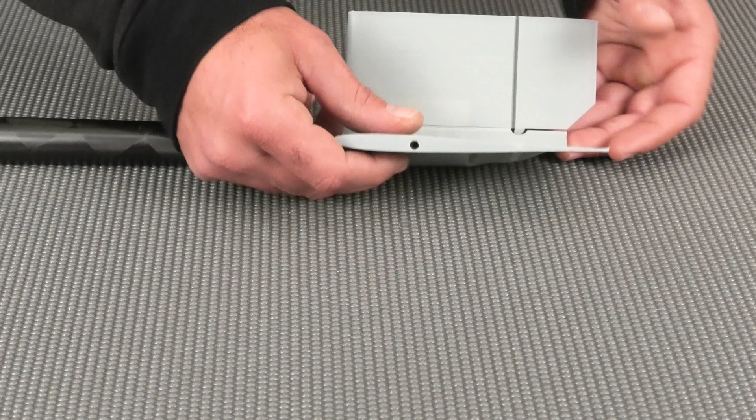In this video, we'll just show you how things come together in the 3D world, in SolidWorks, and how I went about designing all this stuff. So I'll give you a close-up of these 3D printed parts, and then we'll dive right into SolidWorks. So here we go. Here is the makings of a V-tail. I can actually remove these parts from the boom. This is a 60mm section of our V-tails. Obviously I didn't want to print the whole thing because that would just be ridiculous.

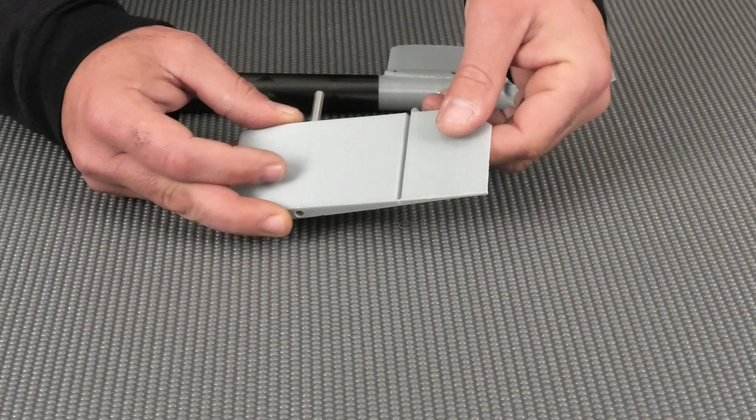I have some metal rods and a little carbon pin in here to simulate the carbon joiner and alignment pin, and we have a control horn here, and you can see the hinge line right here. So basically these parts are almost identical. We are going to use offset joiners, so these joiners aren't identical as far as their placement from the leading edge. So that's pretty straightforward here.

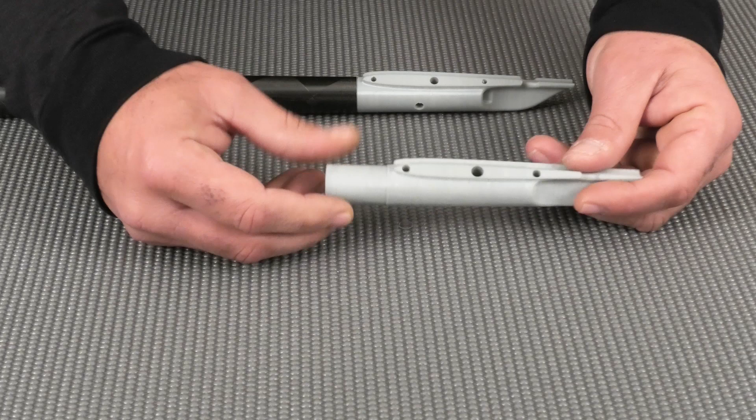And then we have what I call the V-tail mount. These parts are pretty much identical, except this is a final version, and I've increased the size of the carbon joiners to 6mm and the alignment pins to 4mm. On this guy, I had it at 5mm on the main joiner and 3mm on the alignment pins, and I was thinking that was too small. I also have some cutouts here for the push rod exits, but we'll cut those in the final carbon parts so they don't have to be in this 3D printed part.

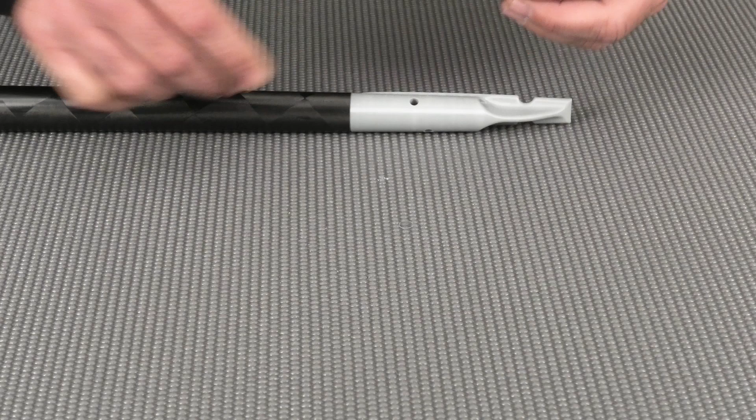The push rods are basically going to exit outside of the fuse and hook up to the tails with ball links. So there's not going to be a cover over this, like a cone. A lot of other models with V-tails have a cover that goes back here. I designed this to be as easy as possible to assemble at the field, basically just as easy as putting a T-tail together. So there you go.

And this guy here, I've already started sanding, and what I'm going to do is prime and polish it and take an epoxy mold off this part, just for prototyping purposes. I really want to lay up one or two carbon pieces and attach them to the booms and see how everything works with the push rods, the ball links, the control horns and all that before we go into aluminum molds.

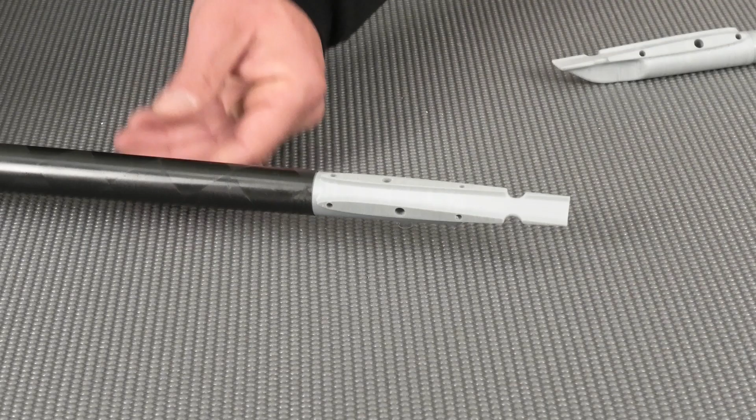The V-tails themselves will probably go straight into aluminum molds. We might mill plastic prototype molds first. I don't know, we're still debating that. So there's my 3D printed prototype parts, and now let's take a look at the computer work. Alright, so we're in SolidWorks.

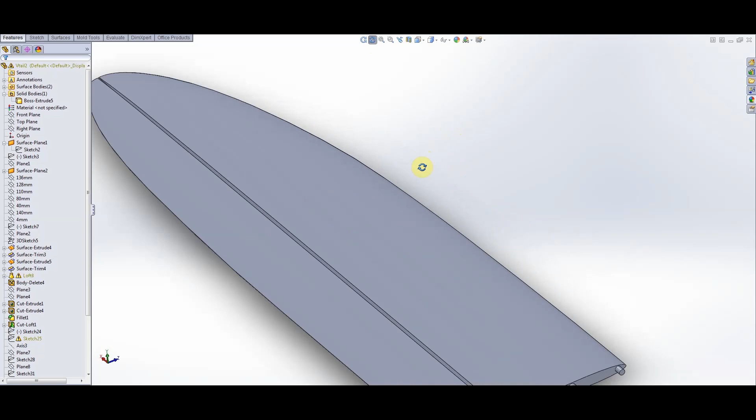Here is my V-tail. This is basically the finished product. Only changes that might occur are to this control horn here. Still kind of thinking about what material to make this out of and whether it'll be installed while the part is being molded or after the fact. So that might change, but everything else is basically set.

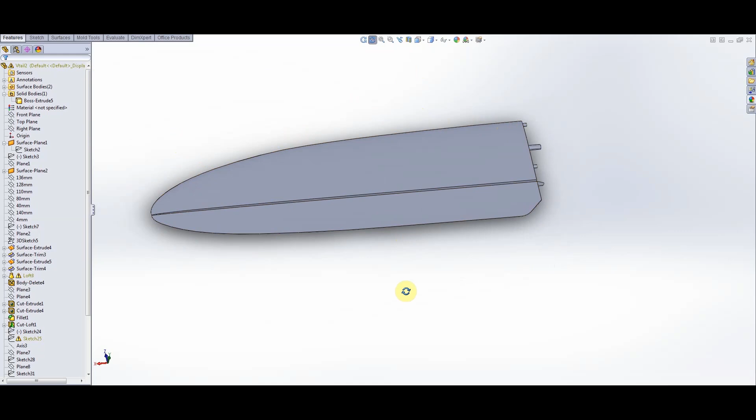So I'll kind of go over the workflow of things. The first thing I did was try to come up with a plan form, and like I said, we already had the area set, so I needed to come up with a plan form to sort of match what our projected area goals are. And to do that, I made a basic sketch here.

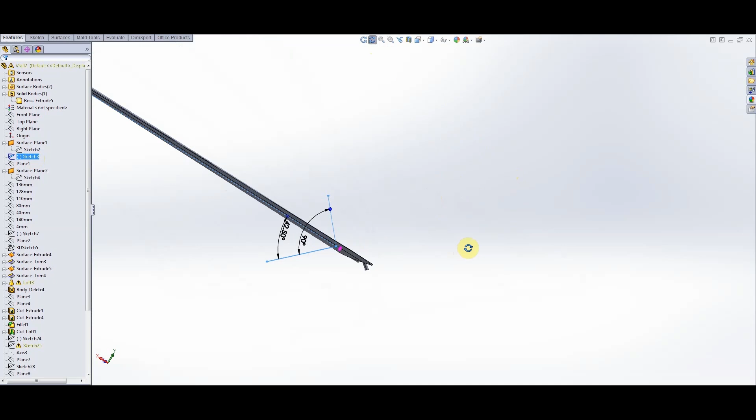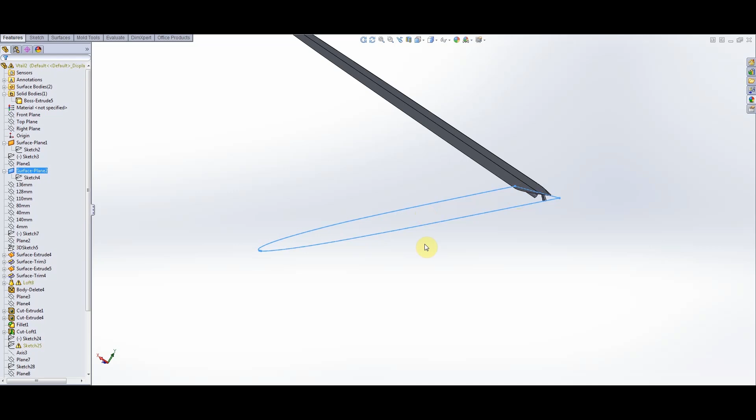You see the angle of our tails is going to be 42.5 degrees, so I've drawn a straight line here. So if this was kind of a straight down view, I could create a surface here and then project the area of the V-tail down to that surface, and that surface is right here, and here is the sketch. So this is simply just a projection of the plan form down, and then I made this an actual SolidWorks surface, and SolidWorks will tell you what the area of that surface is.

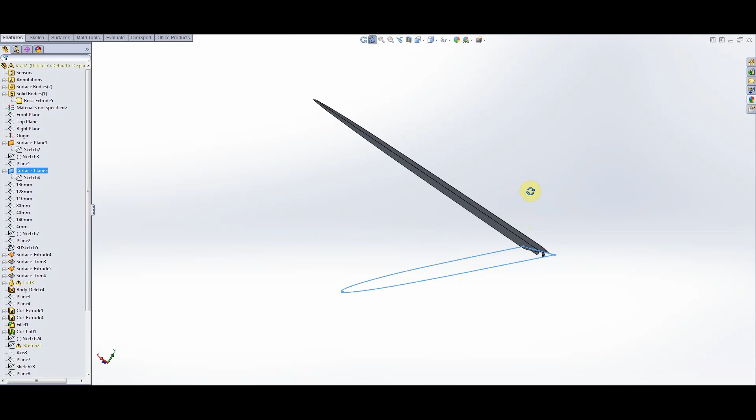And there's a little bit of back and forth you have to do with the span and the shape of the plan form until you arrive at the exact plan form you need for your given V-tail angle to get the right amount of area that you are looking for. So once that was achieved, then basically what I did was started putting in stations for the airfoils.

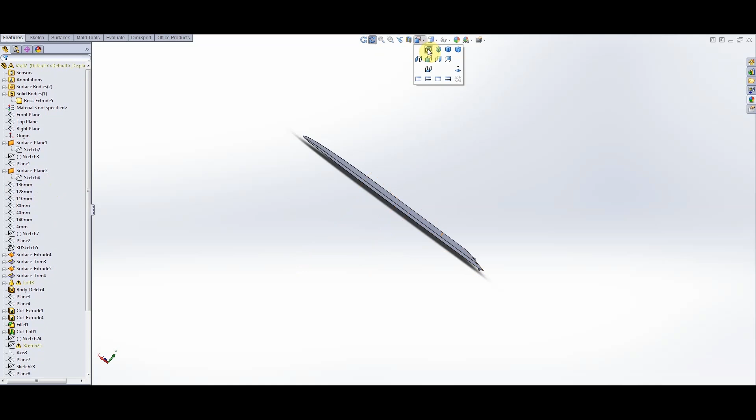So I made a bunch of planes at the various sections you can see here. These planes are in my original or master plan form sketch, which is here. This guy here you can see. So we have our master plan form and our airfoil stations, and then those planes I showed you before are going to be used at the stations to insert the airfoils, I should say.

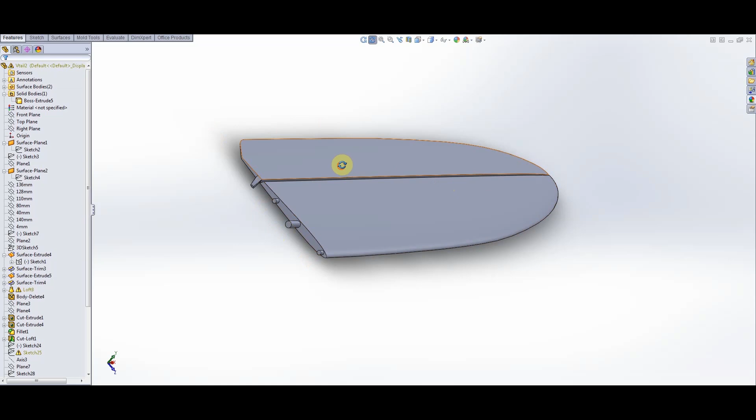XFLR was used to create the airfoil data and manipulate the data for each station. Basically you have to use XFLR to change the thickness of the trailing edge, because if you just used one airfoil, your master airfoil, and then just kept scaling that down, your trailing edge thickness is going to run into virtually nothing at the tip, and you can't machine a part like that.

So XFLR allows you to basically adjust the trailing edge thickness per the chord of each airfoil station to maintain a constant trailing edge thickness. And some manual work goes into that too, or manual math with the scaling. Okay, so basically we have created the plan form and the planes for the airfoils, and the next thing you need to do is basically drop in the airfoils.

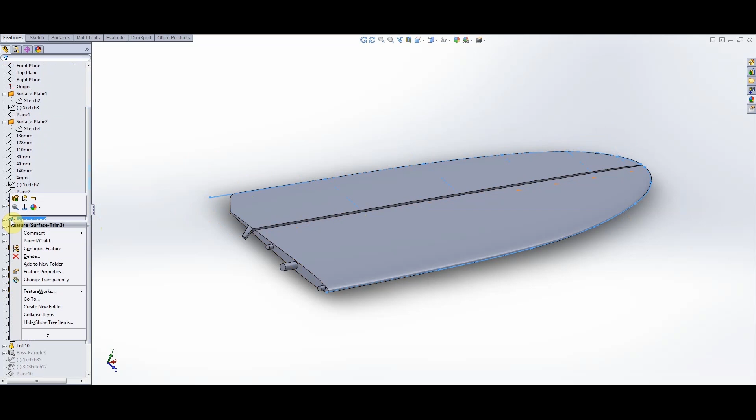Now there's some work that has to be done on the trailing and leading edges to create guide curves for the master loft. So here's the trailing edge surface. The edge of this surface is used as a guide rail for my master loft here, and basically, once I did the loft, I deleted this surface. Now I can show you.

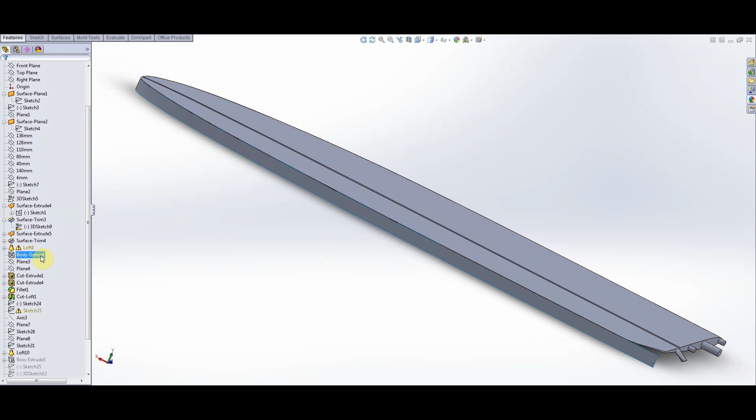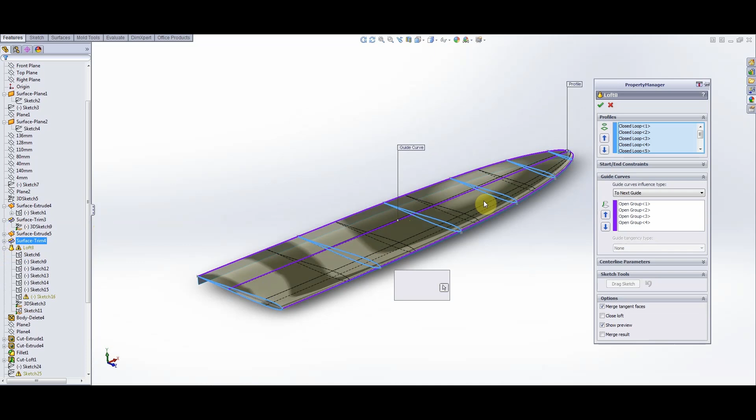This is the master loft right here. This basically creates the whole V-tail. So if I go in to edit this feature, it will show you these are the profiles, so these are the airfoils at each station, and these are the guides right here that I use to help this loft along.

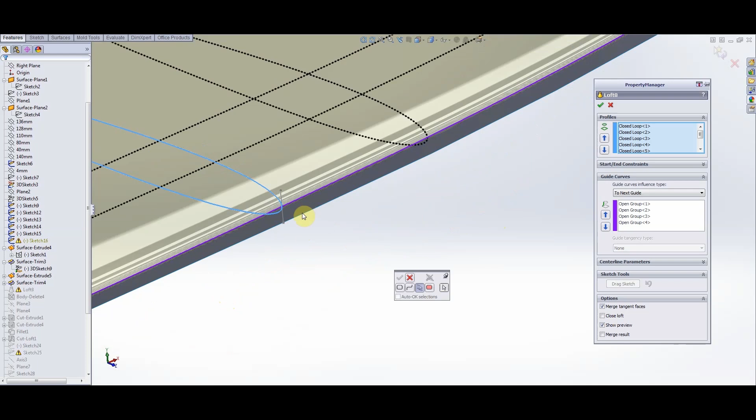If you just pick the airfoils, it would sort of pick the path of least resistance and leave you with wavy leading and trailing edges. So we have a guide curve on the leading edge, which again is created by using the edge of a surface. Here's the surface right here. And the trailing edge, again, same thing. It's the edge of this surface here.

And then this is a straight line. This is the hinge line, and that's also used as a guide rail. So I have, let's see, 1, 2, 3, and I think I actually have multiple. Yeah, I have 2 guide rails here, so top and bottom. And these surfaces and guide rails are kind of a combination of various sketches, both planar 2D sketches and 3D sketches. So we'll just close this guy out here.

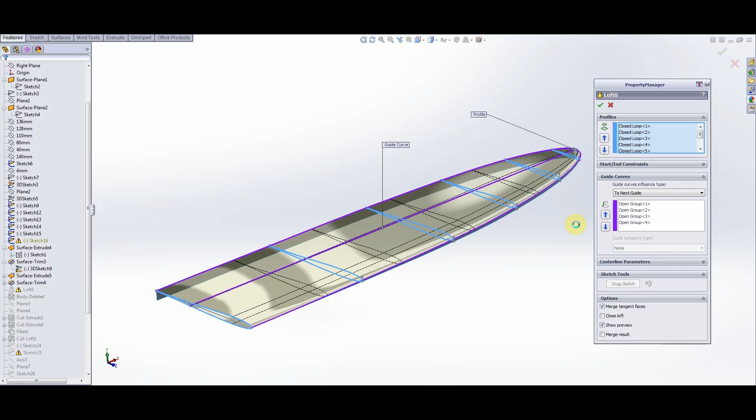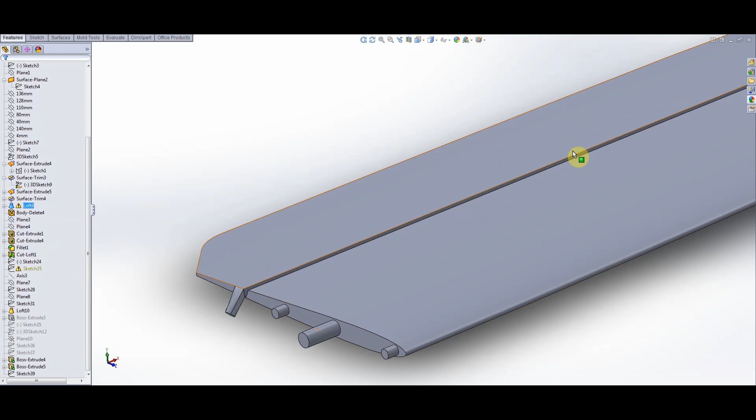Okay, so that loft basically gives you the basic part, and after that you have to do some work. For example, we have to create this channel for the hinge line, and that is also a loft. I believe it is this guy here, so we can edit this loft and I'll show you how this loft was made. So this is the hinge line loft, which is a cut loft, not an extruding loft.

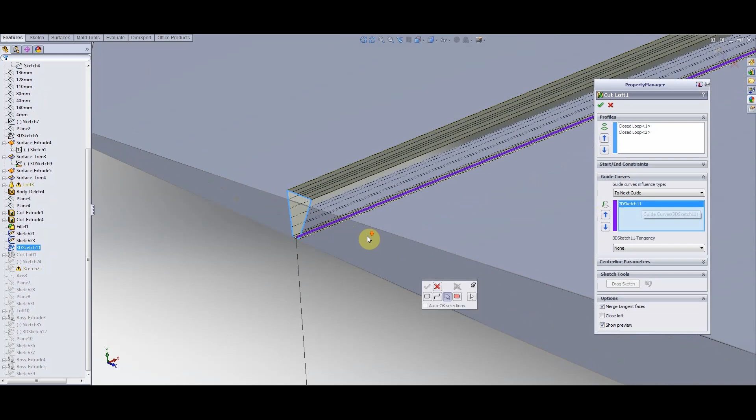And I have a 3D sketch, again, based off the hinge line for a guide rail, and then we have two sketches, one at the root and another one way out here at the tip for the profile. So that creates the hinge line.

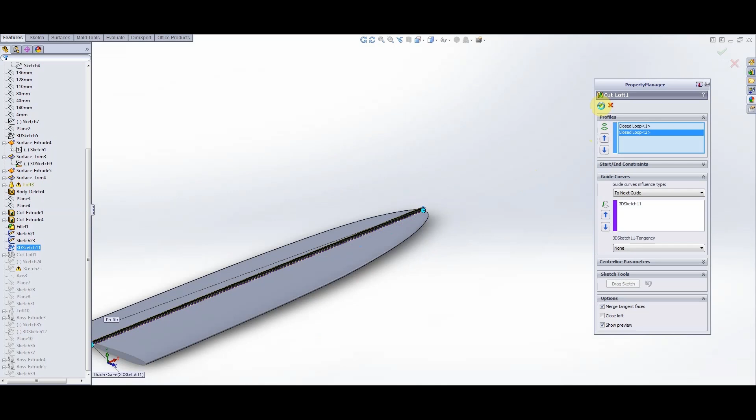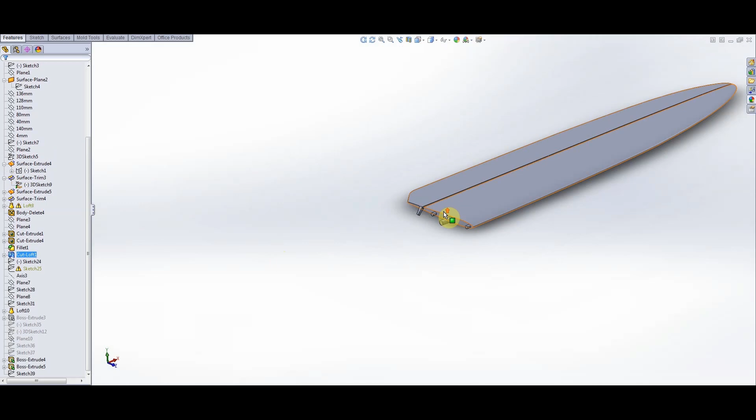And really, you have to be familiar with some manufacturing processes to get the right gap between the bottom surface and this surface here. So this gap was given to me by GCM because they knew what it should be. I really didn't know. So they've helped me out with a few things, definitely. This is definitely a collaborative effort.

So after I did the hinge line there, I moved on to some other items like doing the joiner. So this is the main joiner, and then we have alignment pins here. These are very easy to do. You're just extruding basically round shapes. Let's see here. Here's a sketch to get these locations. 6mm main joiner, 4mm alignment pins. One of these pins might disappear. We might just go with one alignment pin.

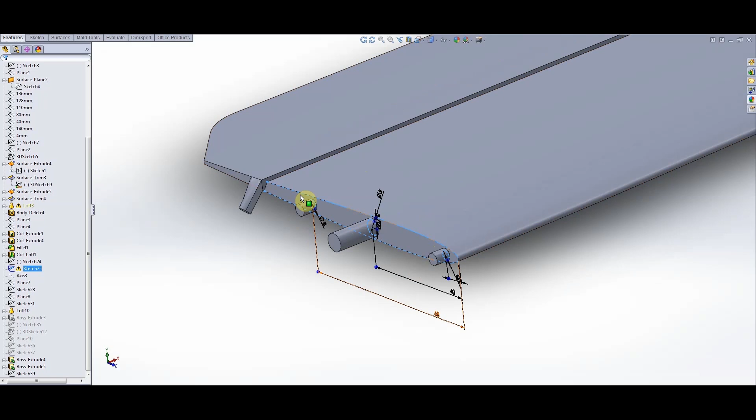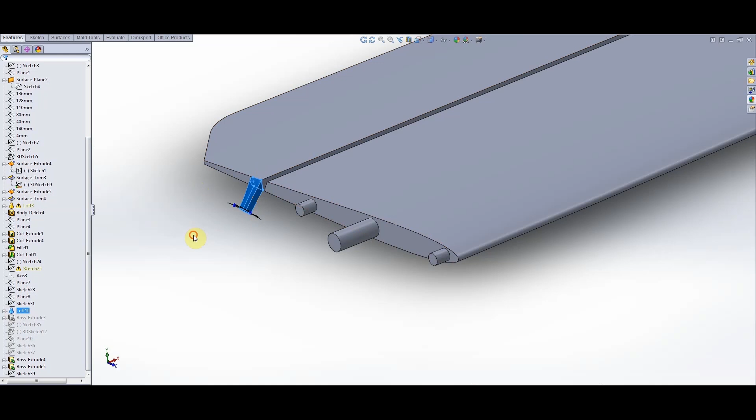These are going to be used to make the 3D model of the mold, so that's why these are sticking out like this. The part's not necessarily going to have a part sticking out here. There's going to be a tube sunk in here, and the actual carbon joiner will be on the fuselage, not in the V-tail. And then we have some work here. This is the control horn. Again, this may change. Okay, so that basically completes one V-tail.

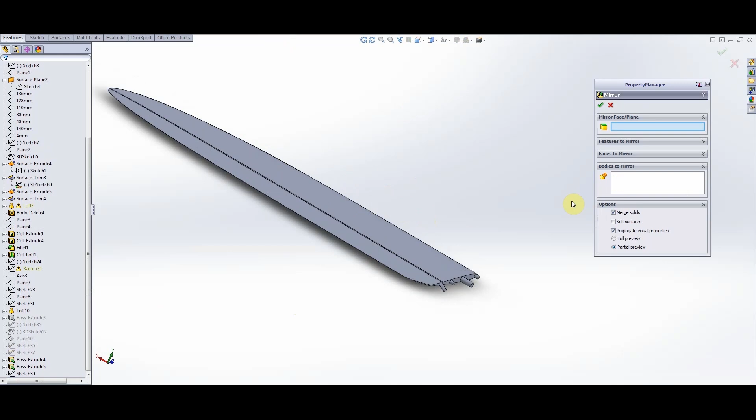So this is the left side. This is the top surface here. And in order to make the other side, it's pretty simple. You just mirror it. So I can show you real quick what that would look like. We're going to select the mirror plane or face, so we'll select this guy here. And then we're going to select bodies, this one, and we're going to unselect merge solids and just hit OK.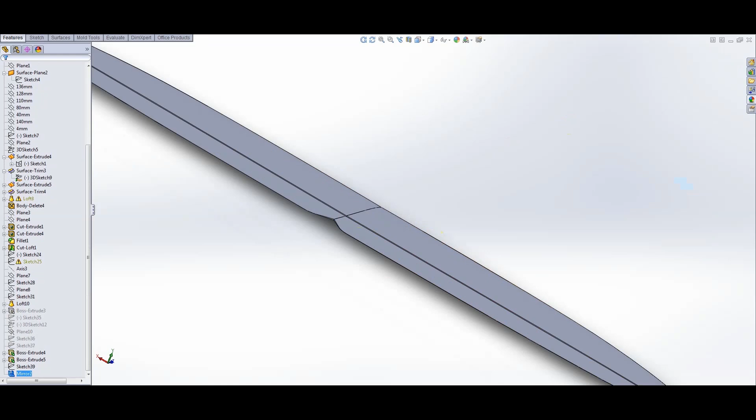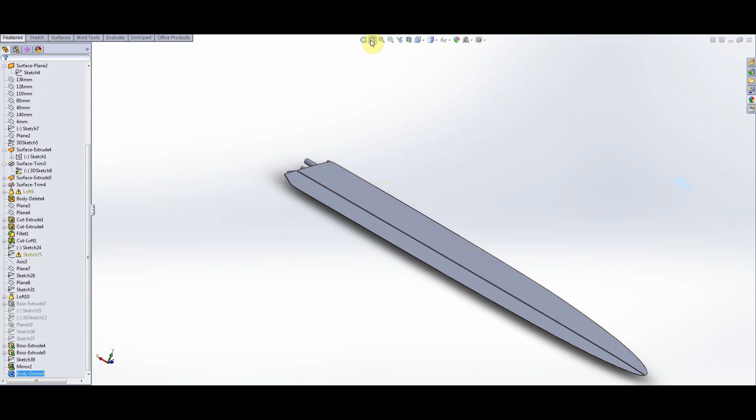If you had merged solids, it would create a single solid part. And now we have two solid bodies here. And we're going to delete our original body. So let's clear the selection, and we'll select this guy here. And there we go. Now we have a mirrored part, which would be the right side V-tail.

Now, if you were to have the same joiner location, this would be perfect. You could just use this as is, but we actually have to move this because we're going to have offset joiners. I already have done the other part, but I would just delete this extrusion and then create another one where the other joiner needs to be. Oh, I've already done this, so I'll just delete this stuff here.

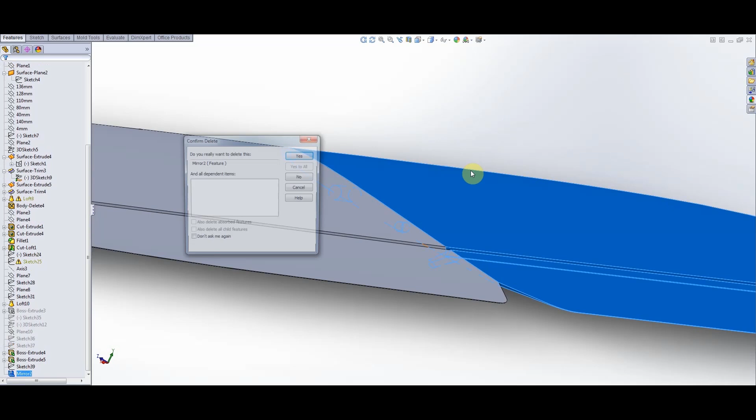Sorry guys, this might be an extremely boring video for some people, but other people might find this kind of fascinating because it's kind of behind the scenes of what it takes to create a part like this. So, yeah, that's basically how you get the V-tails. I would say I have well in excess of 15 hours of work into just this part, because this is probably the 5th or 6th iteration of the V-tail that I've made.

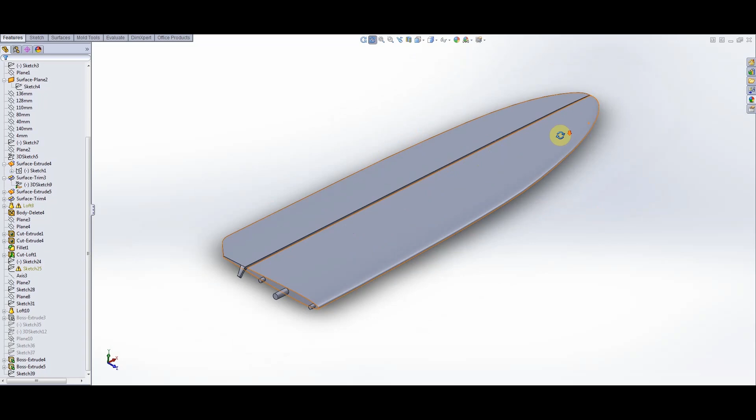You know, I have a background in 3D design work with mechanical structures, but the surface modeling and lofting that it takes to do wings and tail components, I'm not so strong in, so there is some learning for me involved, and I make mistakes and have to fix them. So it takes a long time, but even if I was an expert at SolidWorks, it would still take quite a long time.

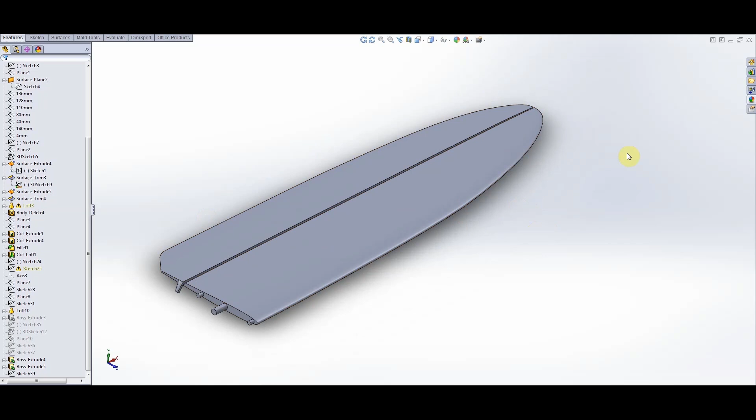So yeah, that's the V-tail done, and obviously you would use this model to create molds. So you would create other 3D models for the molds using a combine feature or a cavity feature. There's a few different ways to do it in SolidWorks.

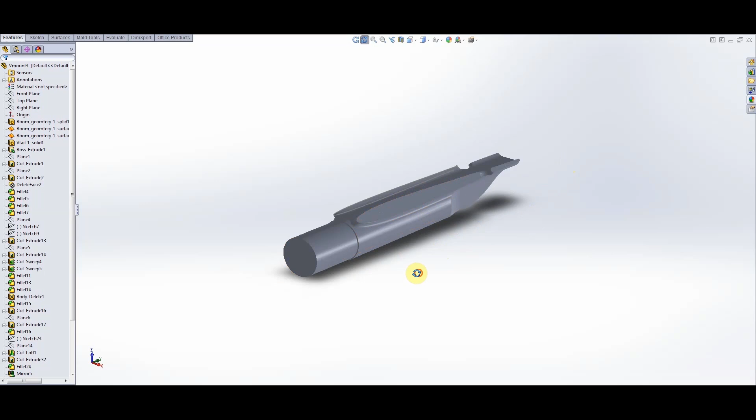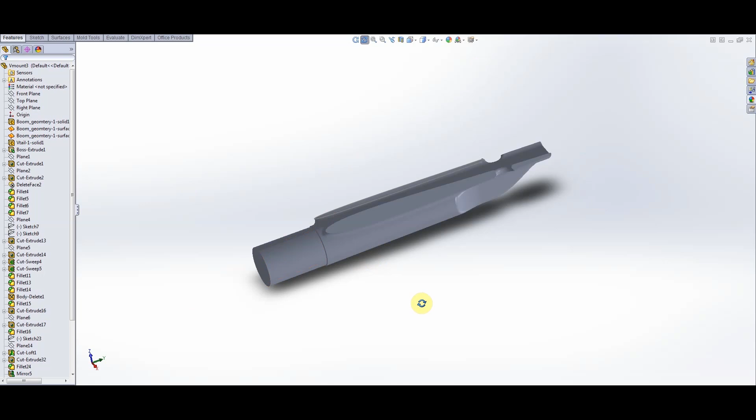So obviously you need a way to mount the V-tail to the fuselage, and what we decided to do was to make a plug-in unit that's going to attach to the existing boom that we have, so we don't have to make an all-new mold for the entire tail boom. Basically we'll put the molded booms in a jig and cut off a portion of the back, and then this guy here will plug in, and we'll use another jig to glue it into the boom and make sure all the alignment is spot on.

So this guy here, for me, was actually harder to make than the actual V-tail itself. So I started out with the original file for the X-tail boom. Let me see if I still have that here.

If I roll back this file, let's see. Maybe too much. Okay. Here are portions of the original file for the X-tail boom, and I think I have this guy opened here. So here it is.

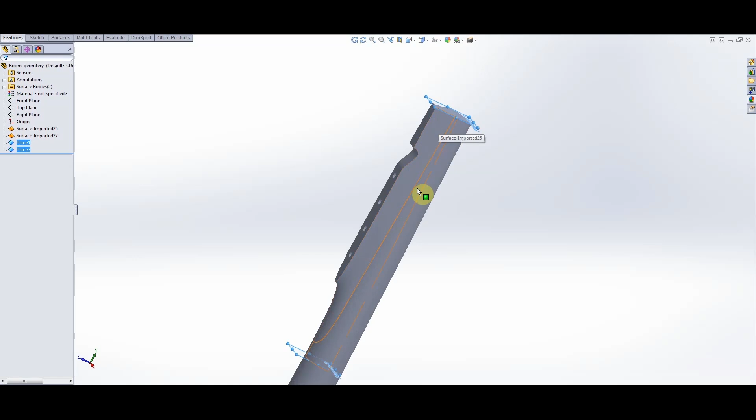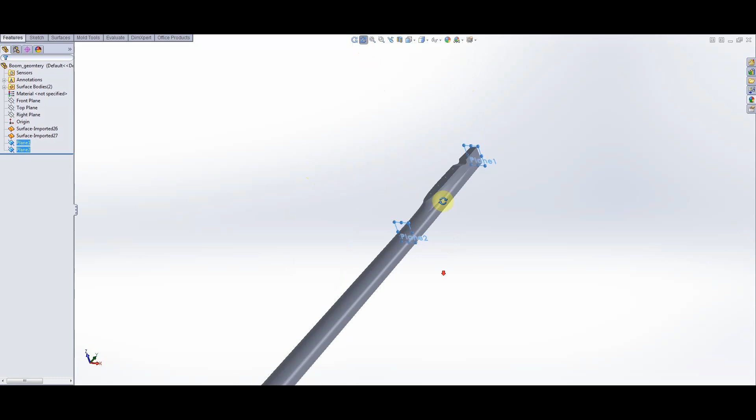Now, GCM, they use a completely different program than I do to create their 3D models. They're doing entirely surface modeling, and SolidWorks is more solid modeling, or I should say I work in solid modeling. So this is a different file type that I had to import into SolidWorks. So there's quite a bit of work that has to be done to get usable surfaces and cross sections out of a file like this. So that's what I've done

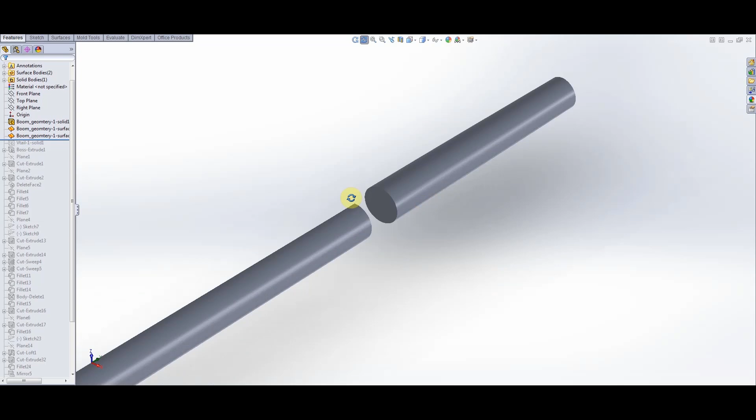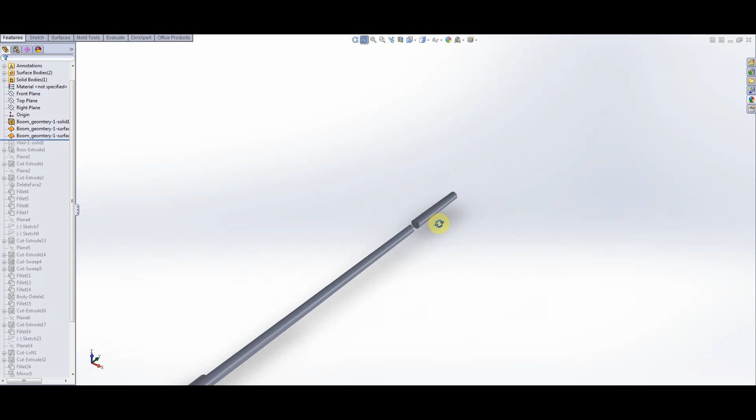in this file here. Anyway, so I got a cross section right here, and was able to use that as a basis for the solid part, and I have the center line of the entire boom to help me with these lofts, so we make sure that the incidence angle on the V-tails is correct. So like I said, I've done that. And we'll go down here.

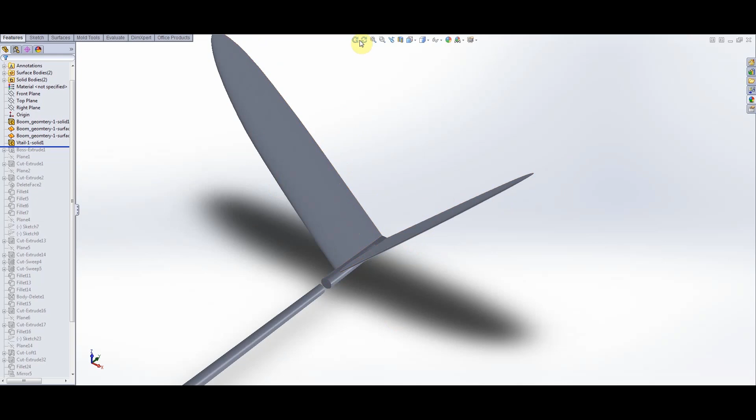So I created a basic loft here, and then imported our finished details. So again, like I said, we made that mirrored part, so I've sort of assembled everything here, and this has given me something to start working with, right? So that's what our details are going to look like, and let's roll this a little further ahead.

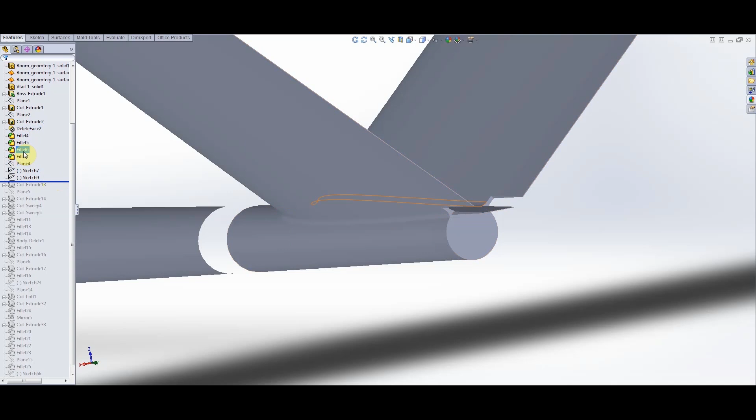So we've started in on doing some work trying to get this part carved out. If you can imagine, this would be like a piece of wood and you're trying to whittle away at the part or add material to the part to get it to what you think it should look like in your head. We have some fillets that we've made here where the V-tails intersect this loft to help with transitions. Ideally, I would like bigger transitions, but I couldn't really get them any bigger in SolidWorks, so that's the best I could come up with.

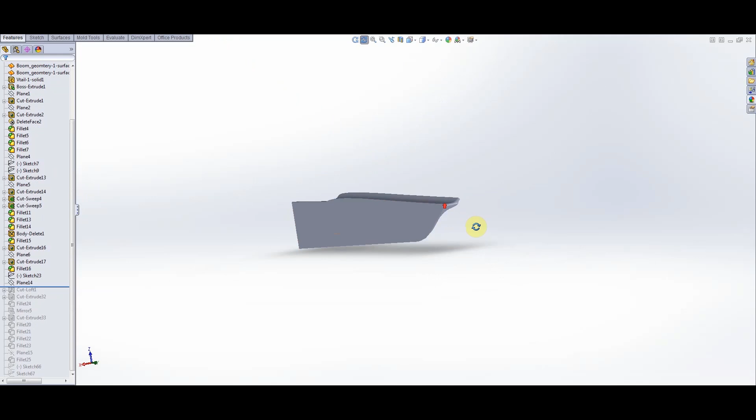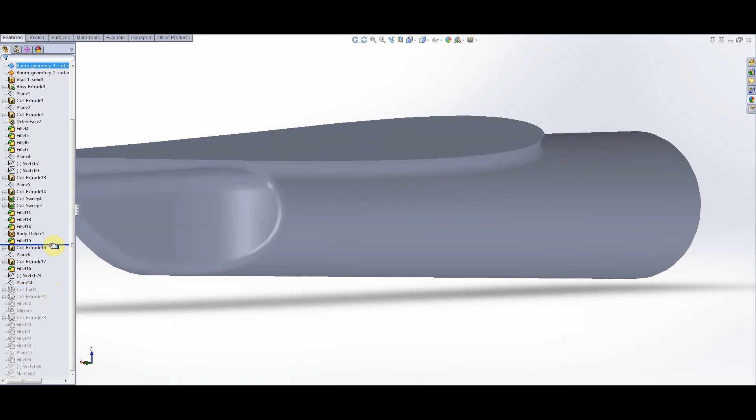Then if we roll this down a little further, we have the part taking shape. What I've done here is basically cut half the part away because I found it's easier just to work on half of the component and mirror it when it's all done. So that's what we've done. Actually, let me show you. Go up here.

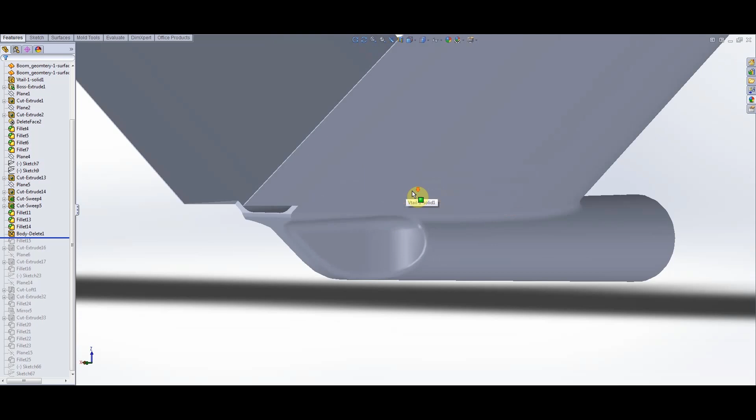So if you look right here, a lot of V-tails have a cone that covers where the control horns would attach to the push rods. To me, on a model like this, the F5J model, which is not flying at high speeds at all, the drag that's reduced by having a cone like that is not worth the hassle of actually assembling the V-tails and making it easy to assemble.

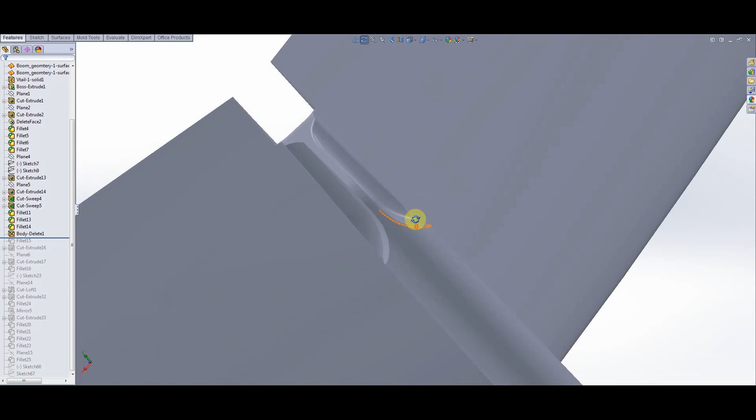So I have kind of stolen a design from the Infinity, which has a cutout like this, so the push rods are exposed. So as you can see here, I've extruded cut some sections away where the linkage is going to hook up. So we have basically kind of like a rib back here, and the push rod will hang out here, and you'll see the control horn exposed.

Let's roll forward a little bit more, and you should see the V-tails disappear. This is an extrusion here to allow for the movement of the moving surfaces. You don't want the moving surfaces just butted up directly against a surface. You need a bit of a gap there. That's what we have. And then I'll just move ahead to kind of the finished product here.

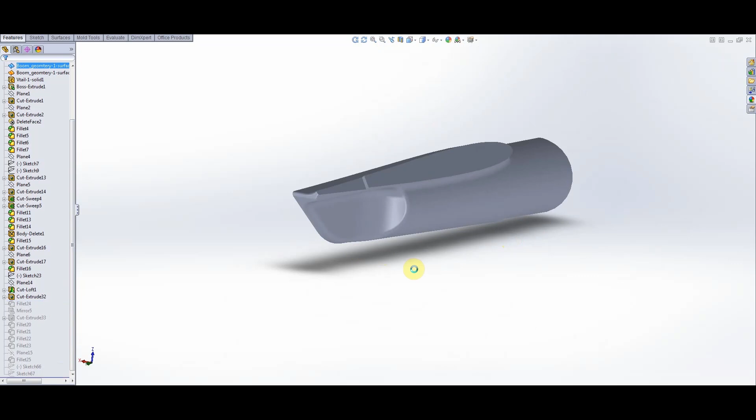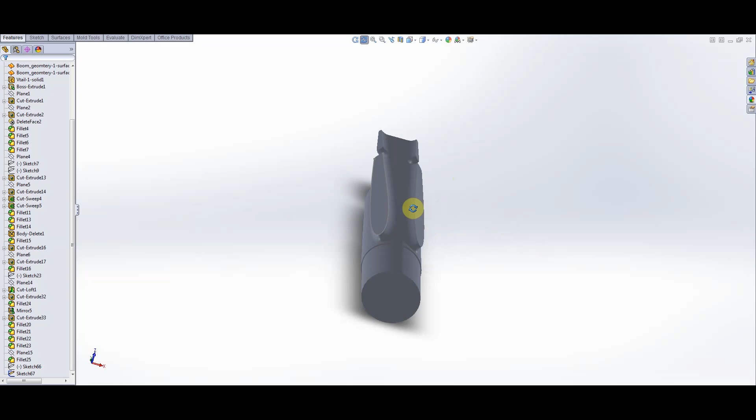There we go. This is basically the finished product. It's been mirrored, so you can see the whole thing is accurate. Now, the way that I'm going to get the holes in here for the joiners, the alignment pins, is basically by assembling the V-tails onto this, and we'll use the combine feature to allow us to make these holes for us. So let me see if I have that open.

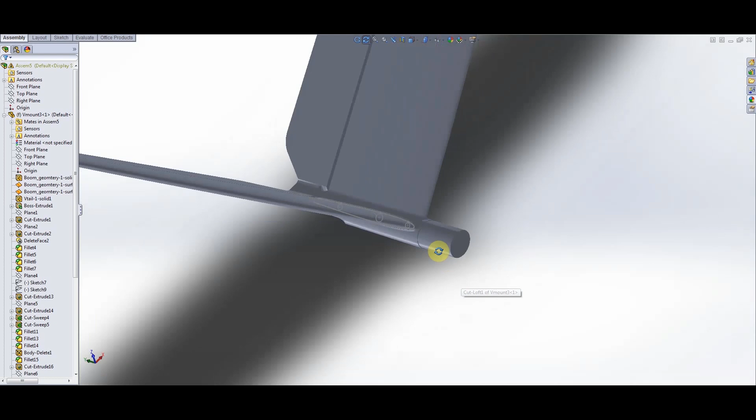Right, here's the assembly I made. So we have our original V-tail, which is the left side here, and the mirrored V-tail here, which is the right side. And they have been attached to our V-tail mount. You can see the control horns hanging out here. These are going to get ball links, so they're going to get little MPJet ball links. So there'll be a brass ball here on the finished product.

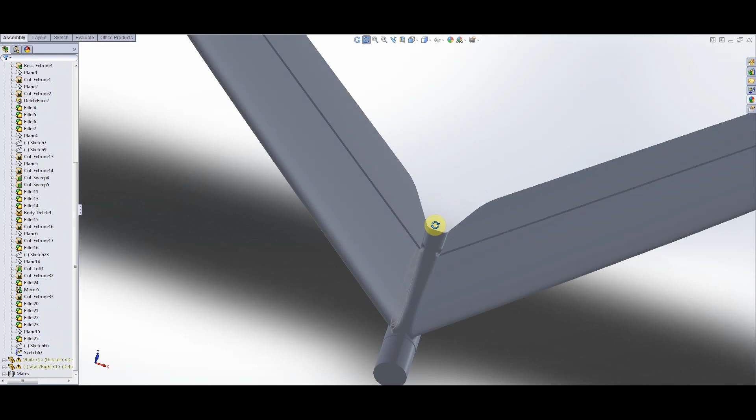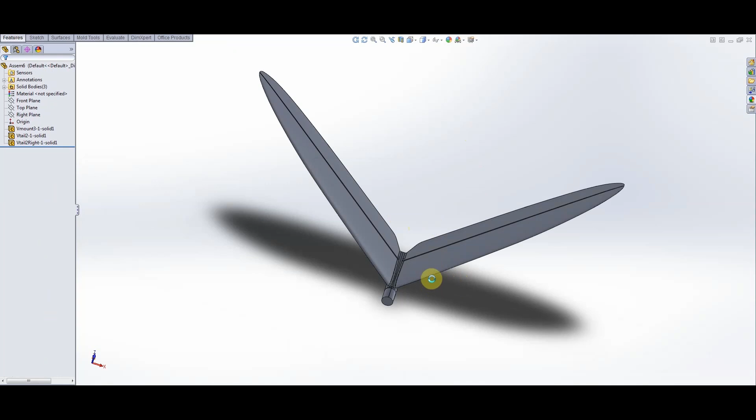So what you would do with this assembly is save it as a part. So we can do that right now. I'll show you guys how this works. We'll just select part, and I've already done this, so I'll just give this an assembly 6 name. Doesn't mean anything. Go open that part. So again, once this file that we're opening is no longer an assembly, it's actually a part. Sure, whatever. Recognize features. Fine. Okay.

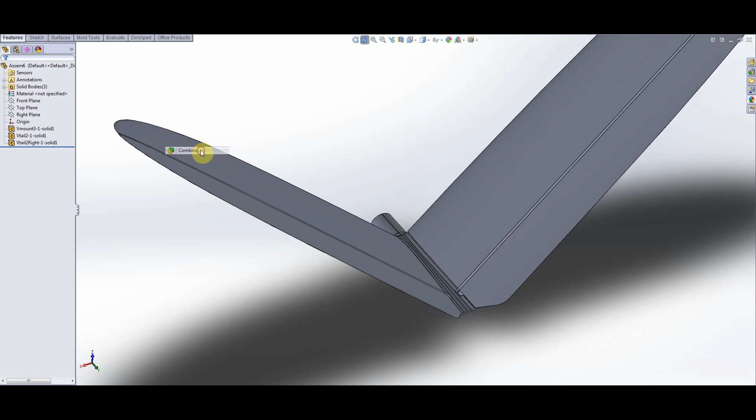So now we can use a feature called combine to help us get those holes in our V mount, or the middle section. So we'll go to combine, and it's already on subtract, but you could also select add if you wanted to do other things. So we're on subtract. We're going to select the V-tail mount as the main body. And bodies to combine, or since we've selected subtract, bodies to subtract. We'll select these guys here and hit OK. Let it do its thing. I don't have the fastest computer in the world, so it's kind of slow.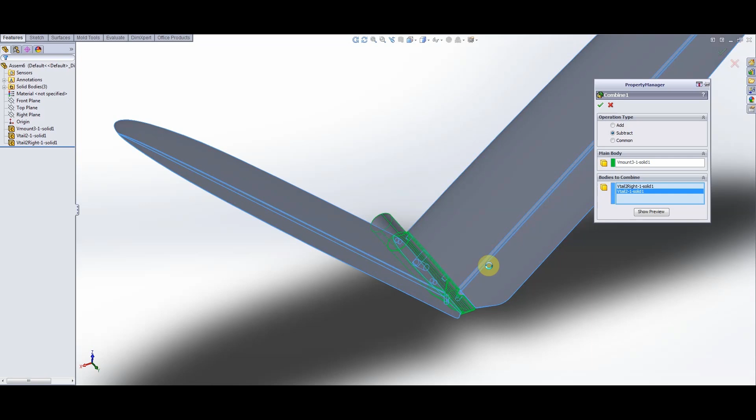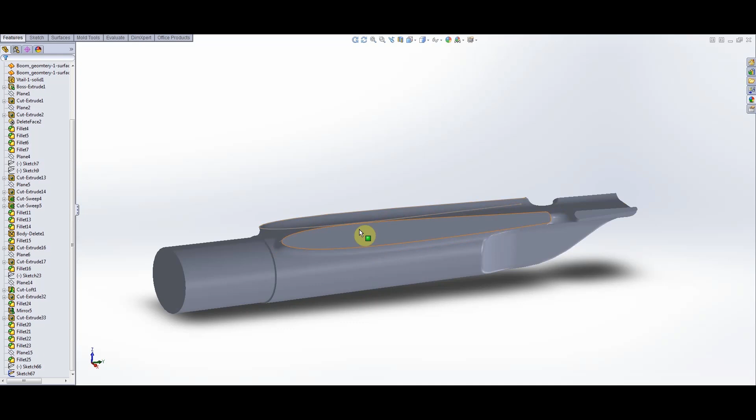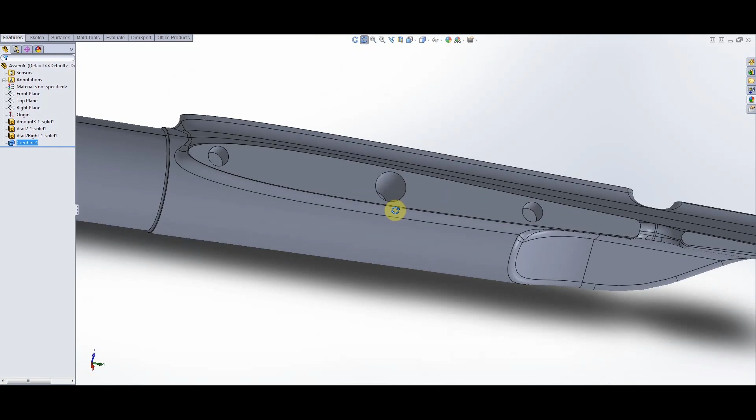Alright, there we go. So as you can see, if we go back to our original V mount, there's no holes in this guy. So we've used that combine feature to create the holes for us. Makes our lives a little bit easier. Okay, so from here, this is basically a finished part. So we have the V-tail mount, and we have the actual V-tail itself, which I showed you earlier.

Apologies if you can hear my gardener in the background.

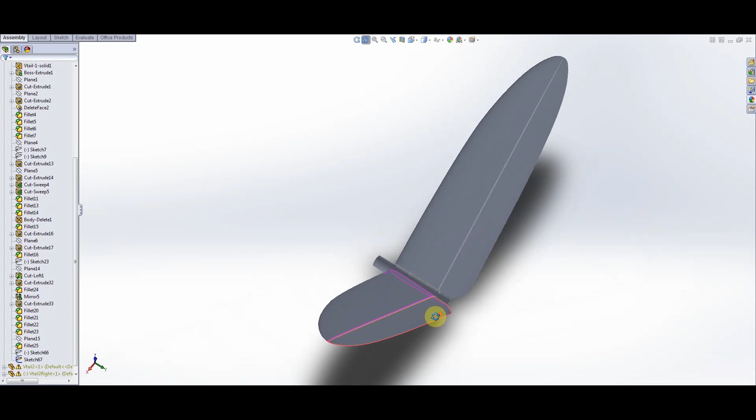So we have to be able to make these parts somehow, right? So if we were going to go straight into machining molds, maybe out of aluminum, we'd have to use these files to create other 3D files to make molds. And again, we'd sort of use the same combine feature to help us make those molds. And there's also a mold tool in SolidWorks. We could use that. So there's a few different things we could do.

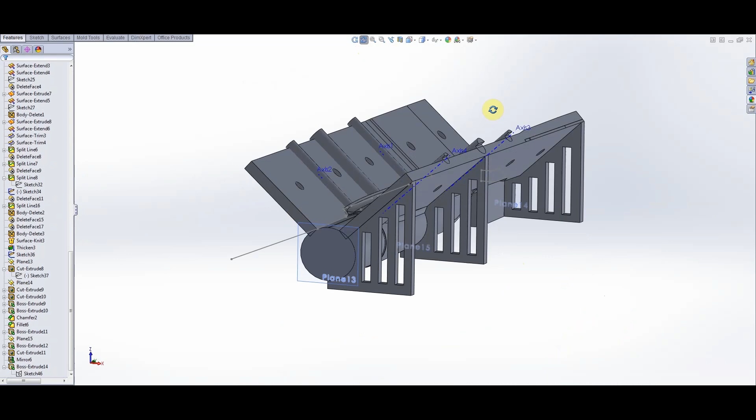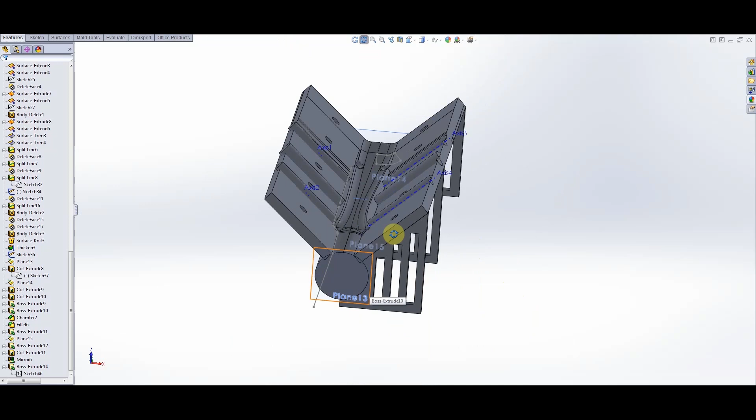So what I'm going to do to help create prototype parts is to actually make a mold of the V-tail mount. And the V-tail itself is kind of a known quantity, so we might go straight to aluminum molds with that. I'm not sure yet. We might mill some plastic molds too. We might do some 3D printing work with that, and we might make prototype parts. But for this mount, I'm actually going to make some composite molds, epoxy molds, and try to make a part for test fitting purposes.

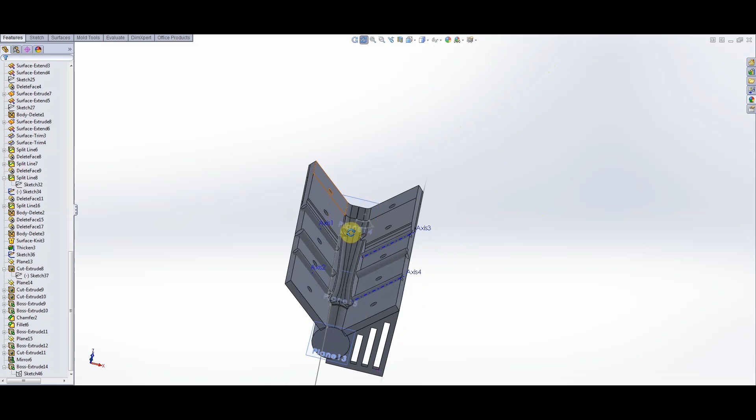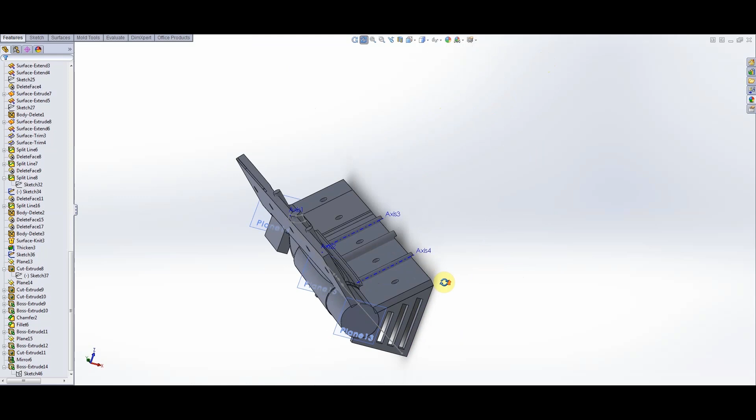So what I've done basically is I have this part here, and I have made some, what would you call these, splitter boards, splitter planes, to help create a mold. So I'm 3D printing all of these parts, so these braces, the splitter planes, and like I showed you at the beginning of this video, the actual V-tail mount itself. And I'm going to use these parts to help create an epoxy mold, and I'll show you that in a future video. But again, I'm using SolidWorks to make all these parts, and I've used the combine feature to create some of these parts. So alright, I think that's just a very quick look at what it takes to create some of these parts.

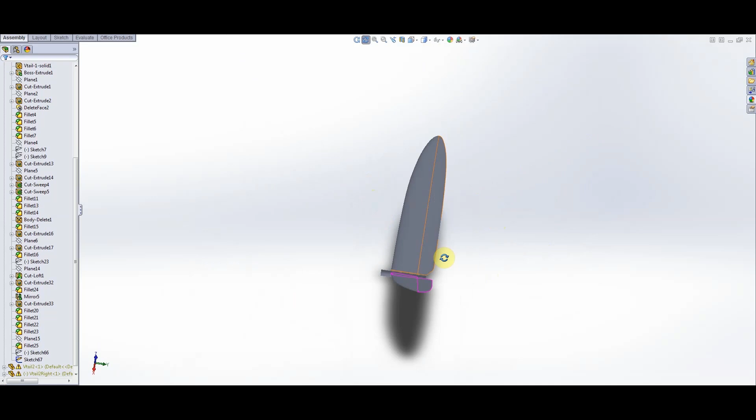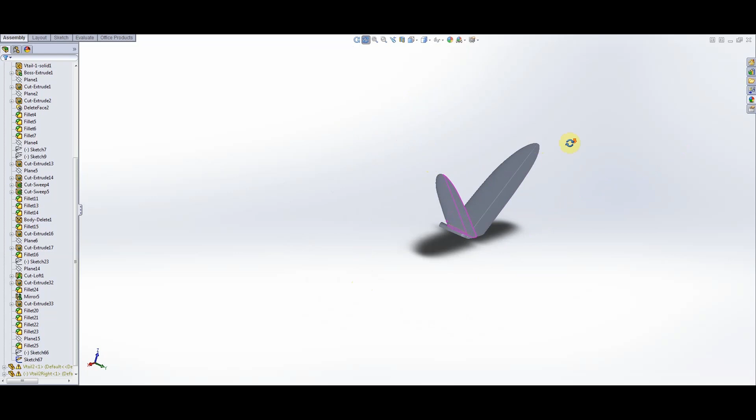This is just sort of a small part of a complete model. We're basically just working with two tail surfaces and this V-tail mount. And I probably have 30 hours of work into this. And you can imagine what it would take to create the entire model. And that doesn't even include any of the other work that goes in with aerodynamic analysis, running simulations and programs on that end, and it doesn't include making the files for the molds. So it's a ton of work, guys. So I know a lot of these airplanes are super expensive, but I hope you get an idea of the amount of work that goes into creating something like an F5J model through this video.

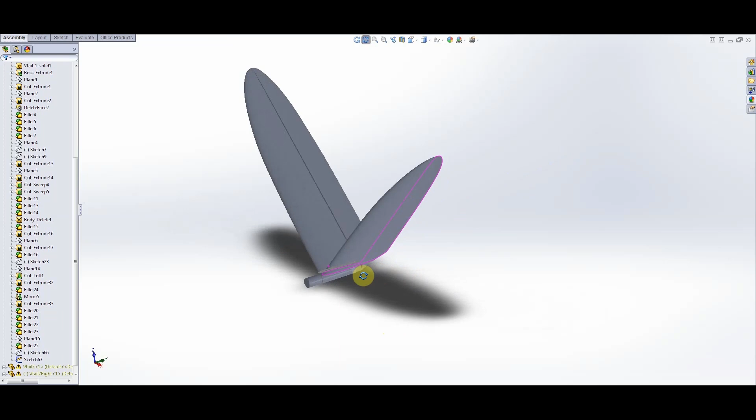All right, that's pretty much it. This was a little different video. I'm going to make a few more videos on the V-tail for the Vertigo. We're going to make this mold for the V-tail mount, and I'll show you guys some of the behind the scenes at milling the molds for the V-tails themselves, whether they're aluminum or plastic or some other material. We don't know yet.